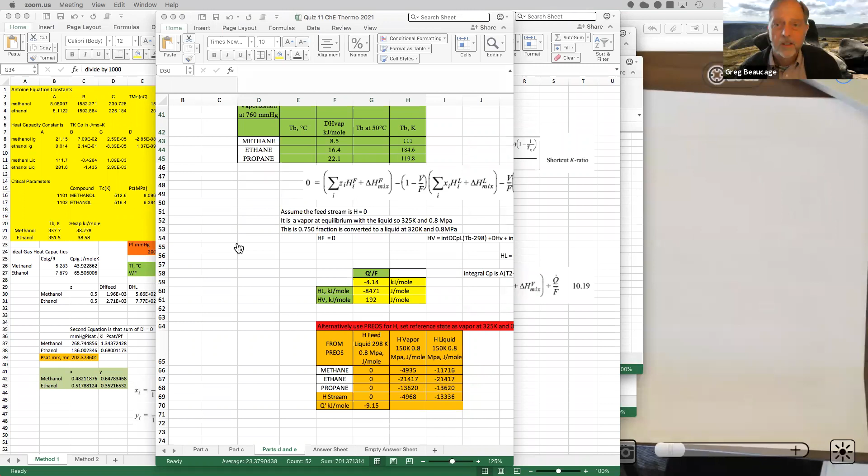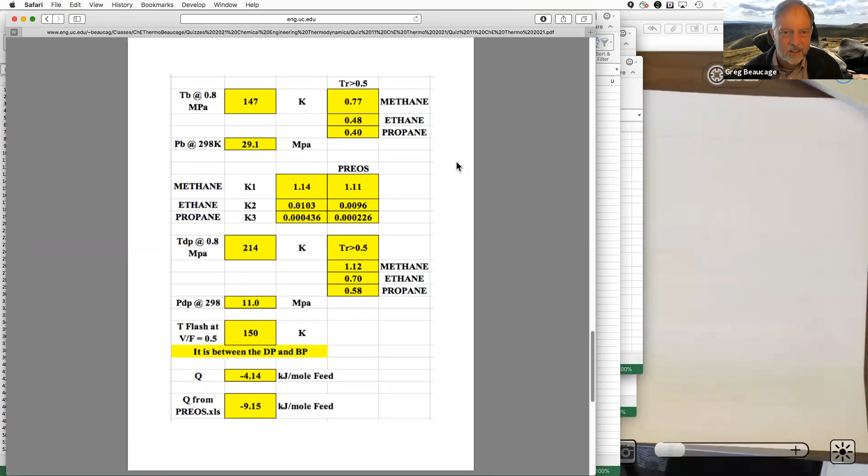Let's see. So the quiz everyone did pretty well on, except one group didn't get it at all. So everyone got 80s or 90s and seemed okay. This is the answer part. So it's just similar to the example problems in some of the old quizzes.

The problem people had, I think, was just with this part E, because you're starting with a vapor stream. So the feed stream is 298 and 0.8. The feed stream's a vapor. So you're given the heat of vaporization, so you have to subtract it from the liquid stream, the product stream, not add it to the vapor stream. So you're feeding in a vapor in this, that was the only thing.

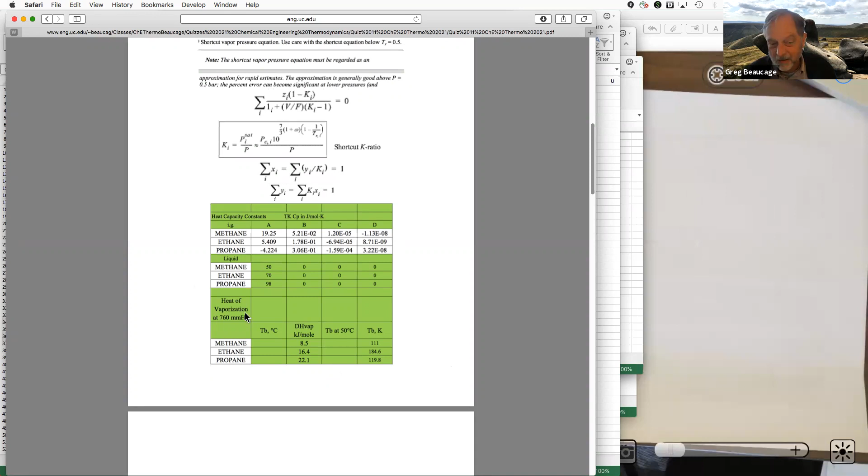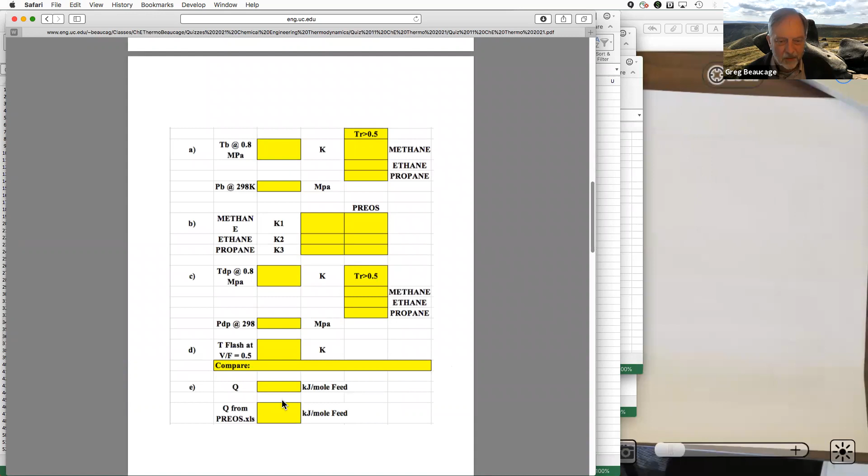So nobody got that, but basically I took 5 points off from everybody, I think. So that was the only issue with the quiz. So a lot of people got 95. Otherwise, it seemed okay. There weren't many questions either, so I think mostly people were okay with this, unless you guys have some questions or there's anything I can go through.

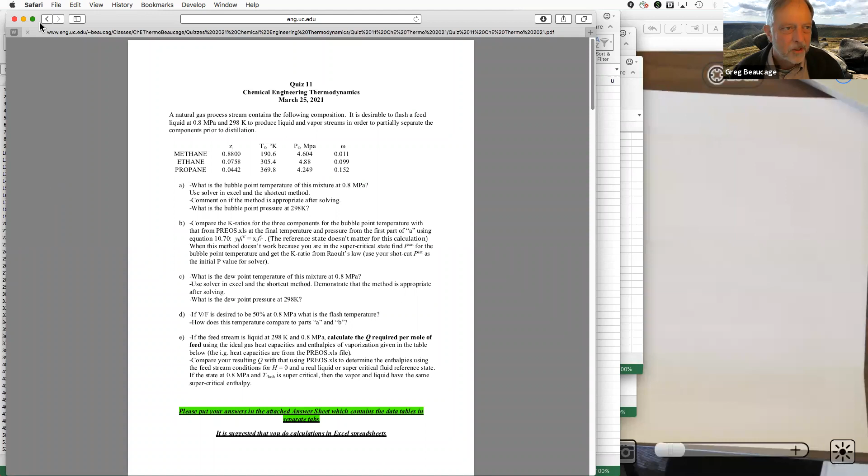Anyway, I put over on the web page, if you want to look at it, this separations book up here, Separation Processes. It's an old book from the 1980s, but it's got chemical engineering separations. Because chapters 10 and 11 are kind of coupled chapters dealing with basically distillation, or the background that you need to do distillation. So the separations book might be helpful to glance at. It's got a lot of chapters on distillation, but it's not really much more in depth than what's in our book.

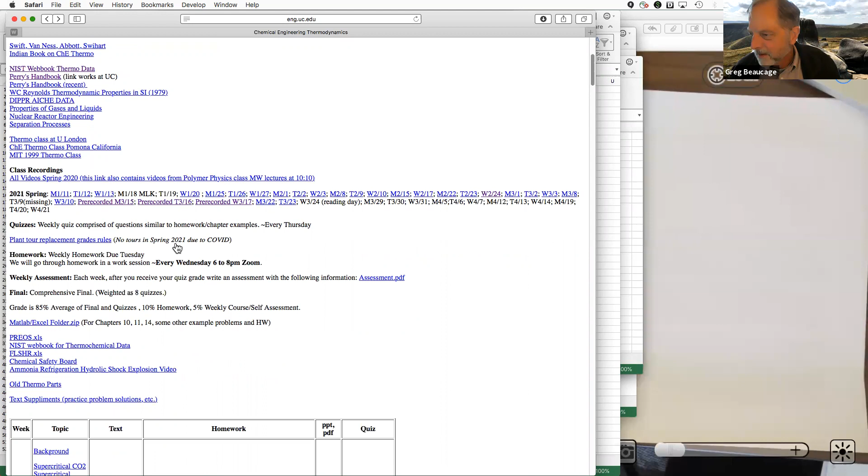So this week, chapter 10 we didn't finish, so I want to quickly finish it. And then chapter 11, coupled with chapter 10, is just for non-ideal behavior, so the activity coefficient. So the two chapters are pretty much tied together. And we don't usually have a split week like this, so that's one of the issues with how we're running the semester now.

Anyway, I think you finished the homework for chapter 10, so you must have done the problems with headspace and tanks and volatile organics. So usually you have to do a calculation to figure out what you're releasing to the environment, and there's some spec for the maximum amount of volatile organics you can release, and it's variable with different kinds. So you have to look up in a table what's an allowable emission for a length of time, especially if you're going to have empty tanks that you need to flush out.

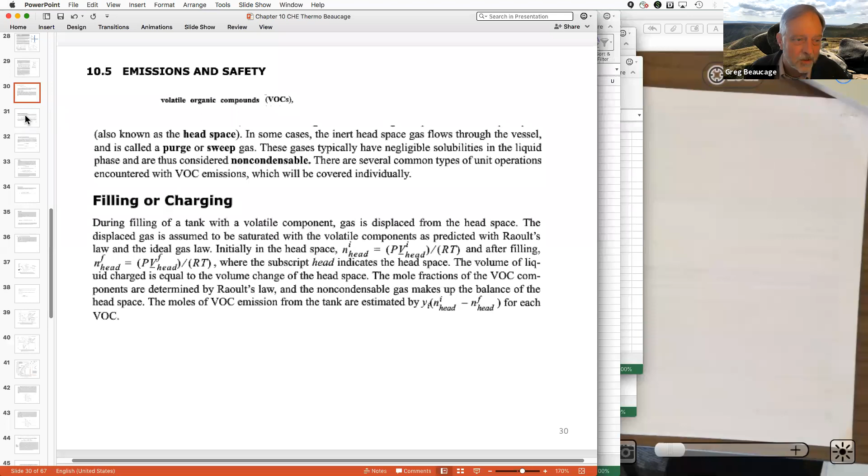And also, as you fill a tank, there's going to be release of the headspace gas. And this stuff is all basically just using the saturated pressure and then the ideal gas equation. That's mostly how these are dealt with in this chapter. It's good that he mentions this because it's something you'll definitely run into. But I think it's just logic to do these, and you've already worked the problem, so hopefully you know how to do that.

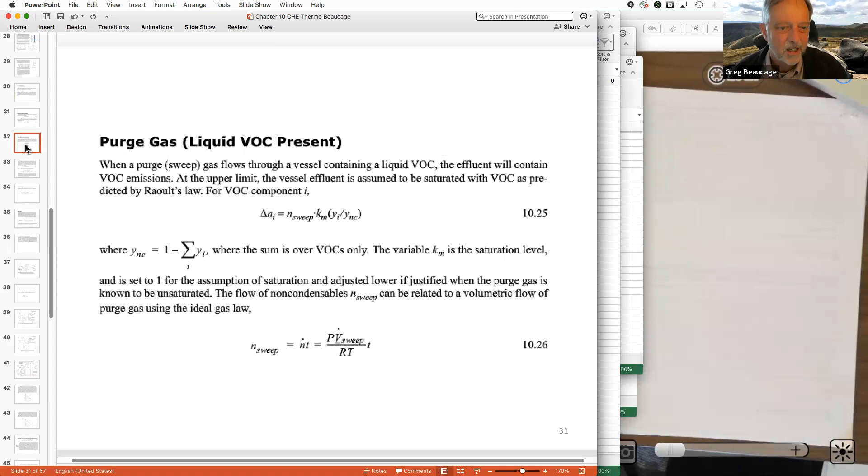Of the venting things, this one is the most complicated. So if you have some kind of a tank and it's been drained, so you drained out all the fluid, it's empty, but it's got PSAT for your components inside of it. And then you want to flush the tank out to remove the volatile organics from it.

So how much time to reach y_i less than death? Like you have some level of concentration of toluene at which you can go into the tank to wash it out, and if you get above that concentration, you die. Basically you want to know how much time it's going to take to get to that concentration.

So you're going to be flushing with some kind of volume, and the tank itself has the volume. And then you want to know what's the time to do that. Right, so you're going to have your concentration of your deadly chemical in time, and your starting concentration is going to be related to PSAT by P, so atmospheric pressure, and the saturated pressure is your starting thing. Then somehow it's going to drop with time until it reaches some kind of safe level.

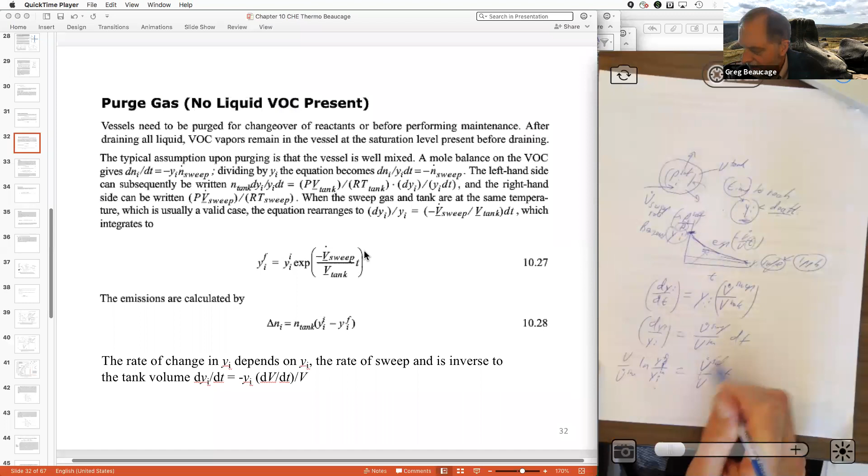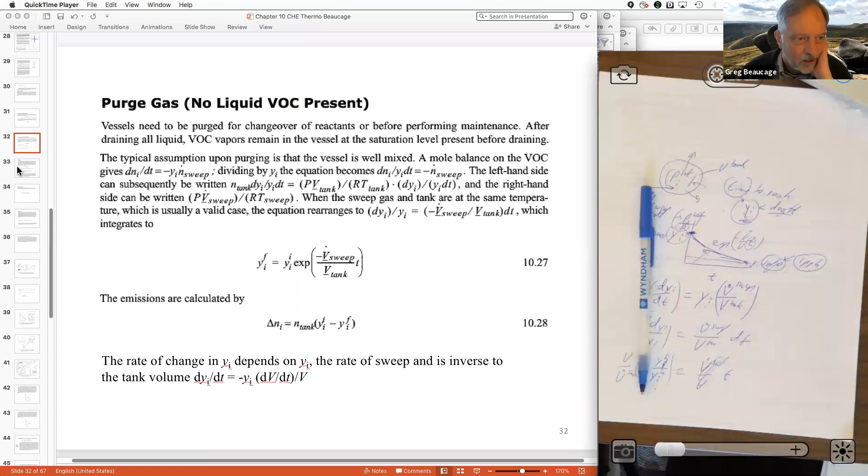So that's the kind of calculation you can expect to do basically all the time. You want to estimate how long it's going to take to make something safe. It's just the same as a radioactive decay kind of thing, you know? So it's like an exponential decay. That's important. And then the rest of this is pretty simple. I think you've already done problems on it. So you heat and it expands and you figure out what the final concentration of the headspace is going to be. Let's see.

Depressurizations. I think you've done some problems with this. It's handy that he's given these things. I mean, this flashpoint calculation is important to determine the danger of being in the tank, right? So even if you have any metal at all, metal on metal will make a spark and then you get an explosion. So explosion means you're making a fire, right? So to make a fire, you're gonna have to have

that's right. So you have to have oxygen and some fuel, and then you're gonna have some products that come out of it. So you can have too little fuel, and then this won't happen. So there's going to be some Y of methane and some Y of oxygen. And it turns out you need a certain amount of fuel and oxygen. So if your fuel is too low, you won't get combustion because the heat won't be enough to continue the reaction. Right? In other words, this reaction is going to release heat.

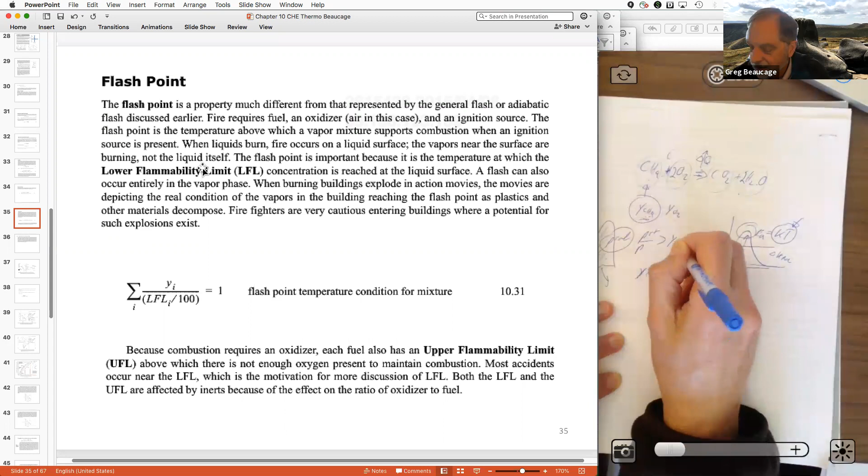So if you had benzene in your tank, but you drained out the benzene, then the tank is full of benzene vapor at Psat. Is Psat over P greater than the Y concentration for LFL, the lower flammability limit? If it's above the lower flammability limit, then you're in trouble, right? Then it could blow up. Then the entire tank is a bomb, right? This is gonna be dangerous. If you're below the lower flammability limit, it's okay.

So if you think about pumping natural gas in pipes, then you're way above the flammability limit. It can't burn. So you're pumping like propane in a pipe. Y is almost like 99%, or 0.99, right? And the upper flammability limit is going to be something like 60%, or 0.6, right? Because you're at 0.99 when you're pumping natural gas, you're safe. But if somehow you get a leak, oxygen gets in here and it gets to 0.6, then all of a sudden you have a pipe bomb, right?

Running through your neighborhood. So basically, there's an upper flammability limit that allows you to pipe natural gas around a neighborhood without an explosion hazard. There's a lower flammability limit that you're really considering when you're doing this tank thing. Like if you have saturated vapor in a tank, you have to be below the lower flammability limit. So you calculate those with this Psat. It's the same thing we've been doing. So that's included in chapter 10, and there's some homework problems to do that. So hopefully that's kind of okay.

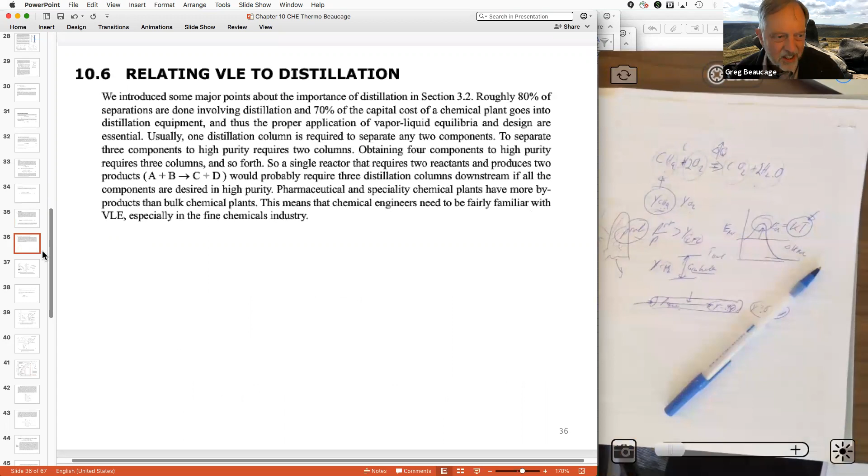So chapter 10 kind of carries a bunch of different things. The other thing is distillation. He goes into it in a little bit more detail here because he's got these K ratios now. So anyway, this is the lab distillation from chemistry lab. So you have a reflux going on. You boil the fluid at the bottom, they reflux. So this is basically at saturation, right? And then you carry off the vapors, and you can condense it into a liquid.

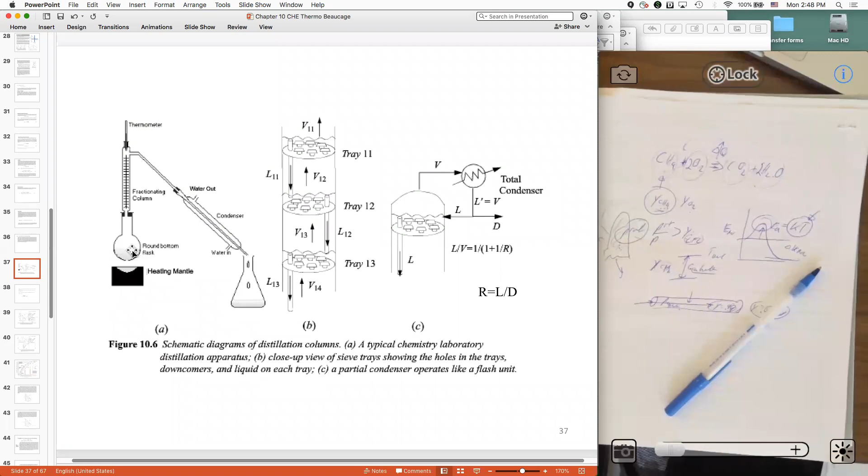And the composition of what's in the boiler and what's in the condensate are different, right? This is richer in the light components. Right, so you have the heavies here and the lights here. So if this is a mixture of a bunch of different things, you could have a heavy key component, and you have a light key component.

So for the light key, you can have a separation ratio, which is the composition of the distillate over the composition of the boiler, right? And you want that greater than a half for the light key, and you want it less than a half for the heavy key. Say you have 10 components in the boiler, then you want to have the one closest to the middle in terms of the boiling, the saturated pressure.

So that the lowest saturated pressure would be on the heavy end, but the highest saturated pressure would be on the light end. You want two components that are near the middle, right? That's going to be your key. So you have 10 components.

This is the saturated pressure. It's increasing towards the light. You want one heavy one and one light one. So a heavy key and a light key. That you know that everything lighter than that's going to be in the distillate, and the other one heavier than that's going to be in the boiler.

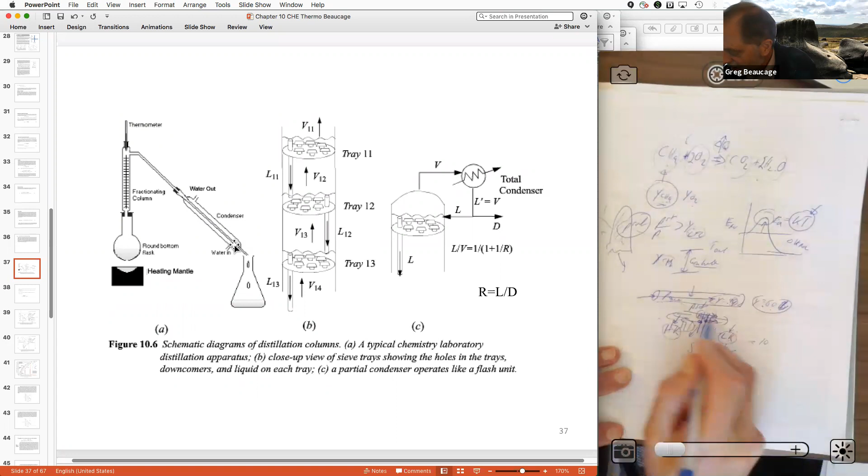Right. So you're separating the thing, and all these components go that way, and all these components go that way. So all the heavy components go to the bottom, and all the light components go to the top. That's the idea. So the heavy key and the light key give you two flags. If you separate those to this 50%, then you know all the other ones are going in the right direction, and all the light ones are going in the other direction. So that's kind of the idea of this, if you have a mixture of things here.

So each of the stages in a staged distillation column, which is only one type of distillation column, are going to be like this boiler. They're going to have a liquid and a vapor in equilibrium. So this L11 and V12 are in equilibrium with each other, and their equilibrium is set up on this tray 12, right? And then tray 12 is condensing vapor 1,2 into liquid 1,2. It's in equilibrium at tray 13.

So each of these trays is like this distillation column. It's like having 3 distillation columns like this. Then here you'd boil it again, and then you'd have another one and another one. So it'd be 3 trays, three of these lab setups. Or you could run the lab setup 3 times to do this same thing.

If you say you doubled the amount of trays, or you tripled the amount of trays, or you made an infinite number of these trays, then this whole thing could just be beads. You could have a packed bed column full of beads or some odd shaped objects, right? They're going to allow this kind of operation to be happening continuously instead of in stages.

So there's different ways to go at this, and you'll learn, I guess, in the separations class, why you'd use one over the other. But basically, the easiest one to figure out is if you have stages, because on each of the stages you can calculate the equilibrium in the same way that you could calculate the equilibrium here. Right.

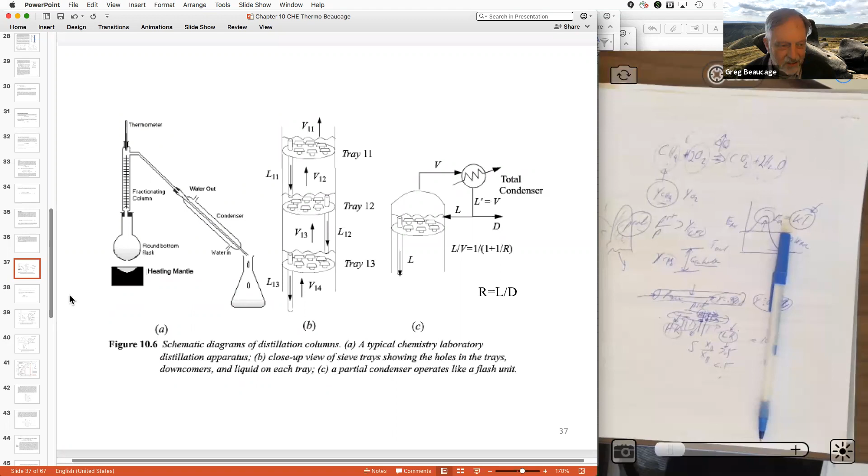So if you want to do a separation where you purify the heavies and purify the lights, then you feed in the middle of the tower. Okay, so the normal operation is to put your feed in the middle and let it trickle down to the bottom and then rise up to the top and do your separation that way.

So in that case, this is how that works. If, say, your feed is half vapor, half liquid, the vapor and liquid compositions are going to give you like 0.6 and whatever here, right? So whatever your feed composition in terms of liquid fraction, then you'd go straight out, right? If it's pure liquid that's being fed, then you go straight up. And if it's pure vapor that's being fed, you go horizontally.

So depending on the composition of your feed, you find the feed composition, like the Z for the feed composition, and you go to here, and then you're going to go across this line depending on the state of the composition. And that decides the slope of the two curves and the pivot point for this. And then this is your purification of the heavies. This is your purification of the lights, right? And then they're going to be at equilibrium. That's the equilibrium point for the feed tray.

And each of these points is a different tray in the distillation column. And then you're changing composition to the next tray and the next tray and the next tray, along the staircase. Right, so that's kind of, this is just from Wikipedia. Basically this is also in that separations book that I put on the webpage, in a little bit more detail. So you can glance through that if you're interested.

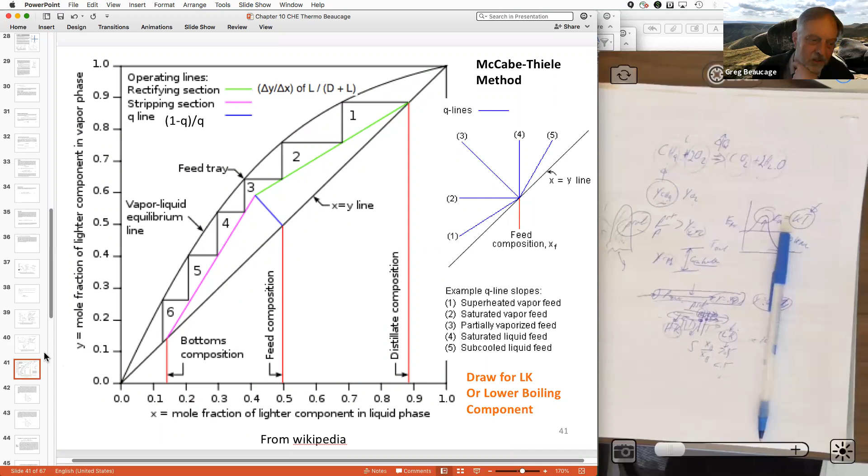So of the separations, 80% are going to be done with this kind of thing in a chemical plant, right? And that's going to account for 70% of the operating cost. This kind of separation is most of the job of the chemical engineers at a chemical plant. That's why separations is an important subject. But for our purposes, it's an example of how you use thermodynamics. So it isn't necessarily the core competency for this class.

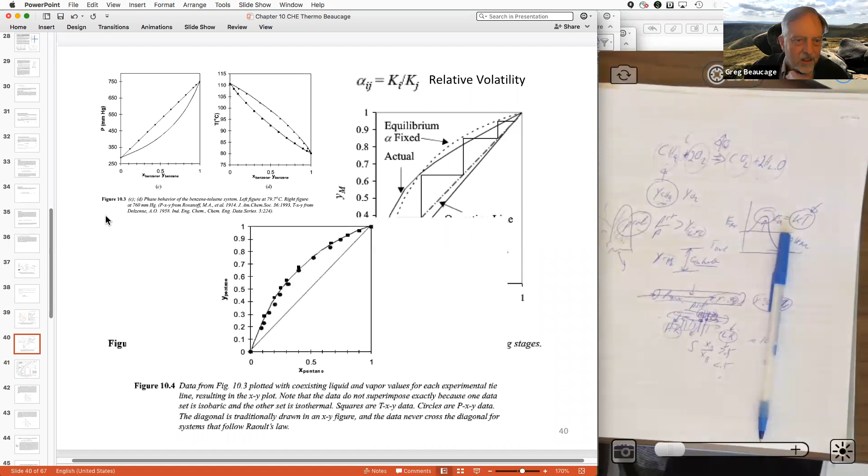What else is in here? There's this estimation equation for ideal solutions for how many stages you need in a column. You can do a calculation. I think there's a homework that uses that equation. But that's kind of all I want to go through for that stuff. Hopefully it didn't take too much time, it's really just a glance at it here. You aren't supposed to become an expert in this class. In separations, you'll become an expert in this.

So this is also mentioned. Chapter 11 is about how you deal with non-ideal systems, but this just introduces the terminology. If two things are similar to each other, like benzene and toluene, then they basically follow Raoult's law, and they're going to have the normal behavior we've looked at so far. Temperature-composition, you can see there's no deviation from Raoult's law. A straight line is right in the middle of this. And the pressure-composition has a straight line, it follows Raoult's law.

So you can have deviations from this. They call it a positive deviation, like propanol-water. So it's going to look like this. And you can have a negative deviation. So this is acetone-chloroform. The straight line is Raoult's law. The vapor pressure is proportional to the composition, right? And then these are deviations from that.

Positive deviations occur when propanol likes to be with propanol, and water likes to be with water. That gives rise to this positive deviation. And acetone prefers to be with chloroform rather than with acetone. So that causes this negative deviation. So with this theory of why this happens, you can kind of predict which kind of deviation you would get.

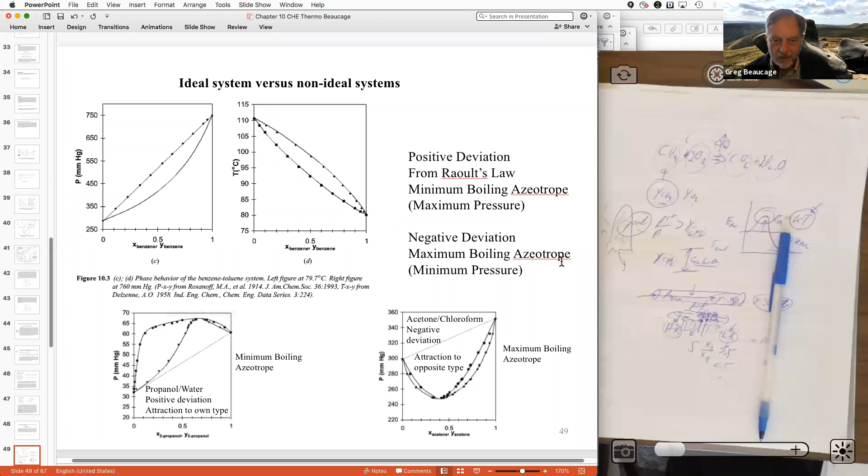Here it's just to say positive deviation, negative deviation, the word azeotrope. Minimum boiling azeotrope means it's maximum pressure, because the T composition chart is the opposite of this. It's going to be below. And then negative deviation means maximum boiling azeotrope, means the temperature composition one will be above. So I'll show you those in a second.

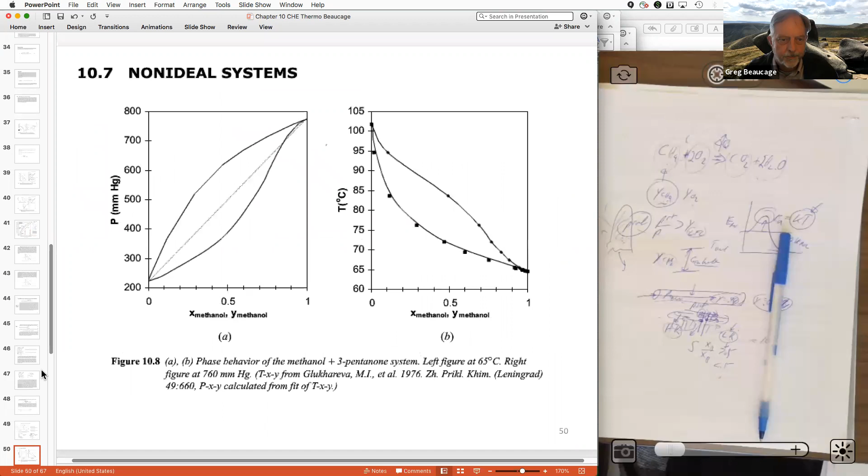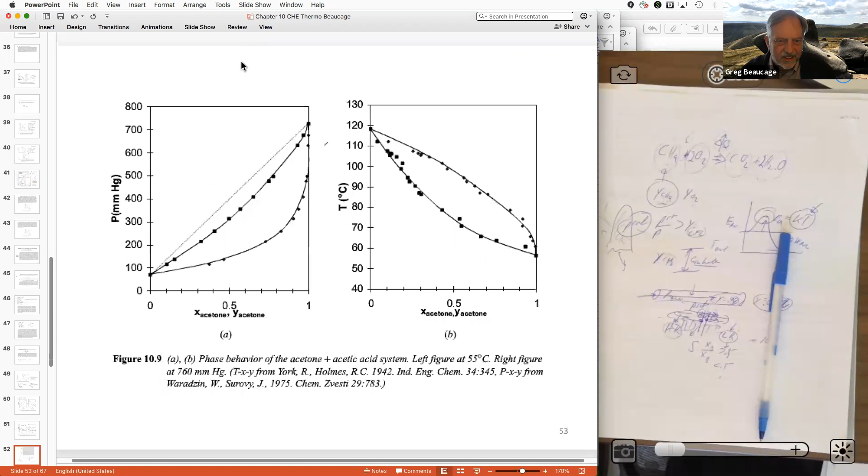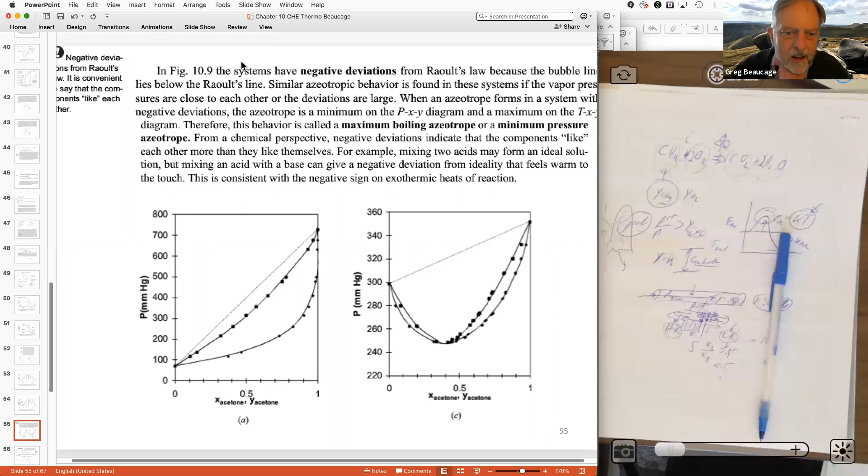Then there's this thing that's usually kind of a separate chapter in a normal thermo class because it's engineering. It's less emphasized. So we had these equations, we had this guy, and then we said, if you want to say Gibbs free energy, the change in Gibbs for boiling is going to be H minus TS. So you can say that a change in Gibbs is going to be, let's see, that's not what I wanted. That's something we need, but not what I wanted. dG is minus S dT and then V dP.

So you can say dG equals, so this is dG already, right? So minus S is dG/dT at constant P. And then V is dG/dP at constant T, right? Because that would just be an expansion of this, from those two parts.

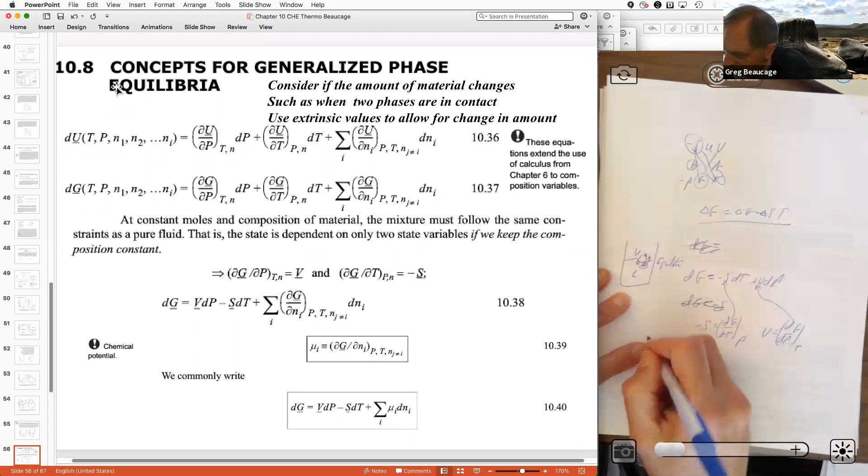So say you have liquid and vapor, right? And the vapor pressure involves an atom, or a molecule, going from the liquid into the vapor, or from the vapor back into the liquid. So that's what we talk about in terms of equilibrium. So if you have one atom that's going to jump up into the other phase, then there's a change in the free energy of the system with respect to that atom changing phase.

So instead of G, the intrinsic number, meaning per mole, you need the extrinsic, which means just the value, like G underscore. Because if you're changing the moles, you need to consider G underscore. And then you can write this same equation for G underscore, because it's the actual value, not the per mole value. Then you have dP and dT terms. So this one's minus S and that one's V.

And then because this isn't per mole, you can ask how the Gibbs free energy changes when the atom jumps to the other phase. So that free energy change when the atom jumps to the other phase is dG underscore dn_i.

So say in the liquid, that's called the chemical potential. That's the definition of it. So we have this chemical potential term showing up: dG/dn, everything else held constant, including the other components, the composition, and then dni for that component. You're going to sum over all the components in the system. So that sum will be just the chemical potentials of the system. And we showed already the chemical potential is related to the fugacity, RT log fugacity.

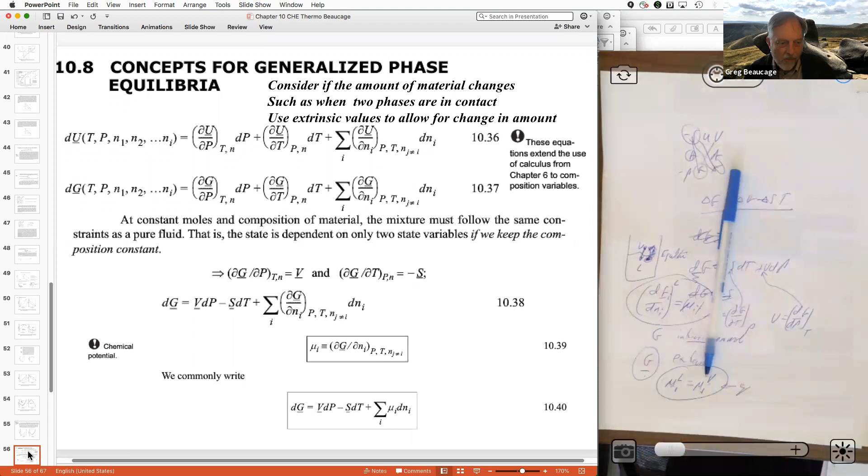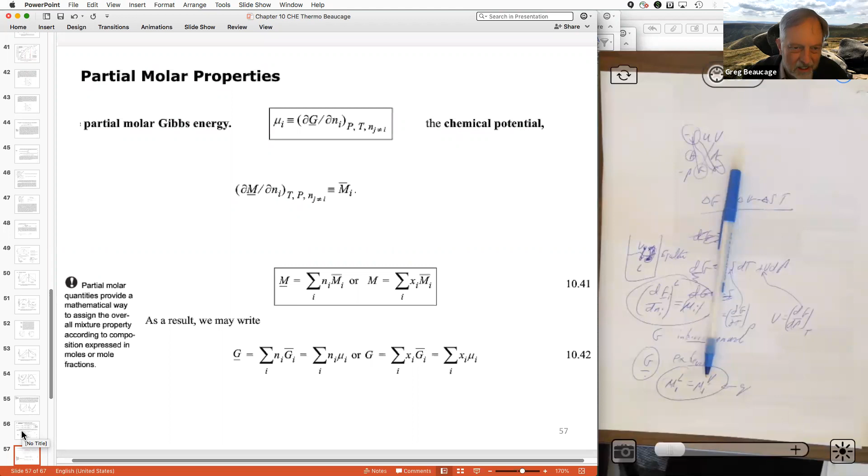Okay, so that's kind of important, but not in any homework problem or anything. It's just a basic thing that's usually emphasized. In this book, it's just an aside at the end of the chapter. So you rewrite all these equations we had before into this idea that they can jump from one phase to the other. So you can talk about the chemical equilibrium between the two.

You have these equilibrium terms for two phases. So this chemical potential is going to have two things with it. So you get mu i, it has to have i, and it's got to have a phase. So each chemical potential is going to be mu of benzene in liquid, mu of benzene in vapor. And those two are equal at equilibrium, but they don't have to be equal if it's not at equilibrium. And then you're also going to have mu of toluene in vapor and mu of toluene in liquid.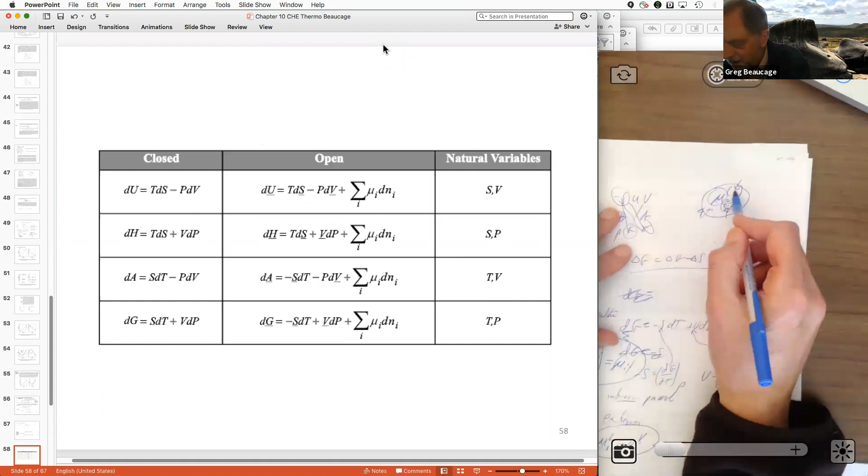So if you have a binary solution with two phases, you have four chemical potentials, right? And two pairs of them are going to be equal to each other if it's at equilibrium. So every time you say chemical potential, you have to say what phase and what component. You can also have a chemical potential for a pure system. You wouldn't have components if it was just benzene, but you would still have two phases, liquid and vapor, or liquid, vapor, solid. So that's kind of how this chemical potential thing works.

What else? Equilibrium criteria. When it has a hat over the fugacity, that's a component in a mixture. So the fugacity of i is just for pure. Fugacity with a hat means that component in a mixture, right? And then this is just what we had before, that the chemical potential change is the change in the log of the fugacity. We had that before, so it's just reiterating that. And then at equilibrium, the component fugacities are equal.

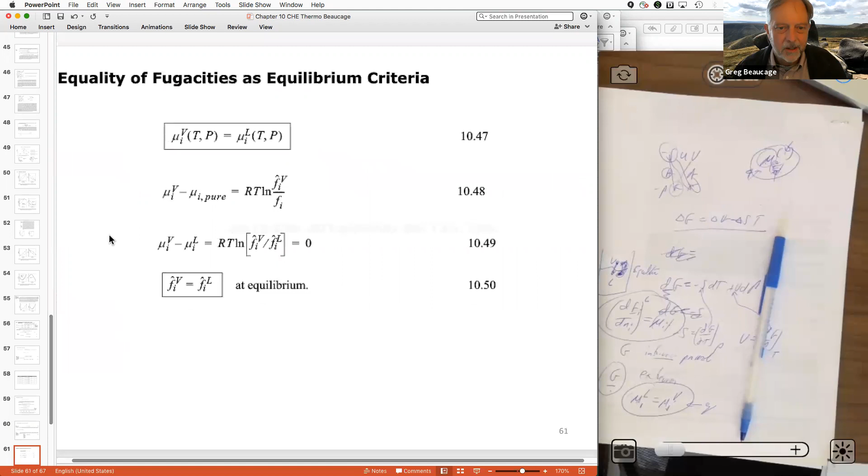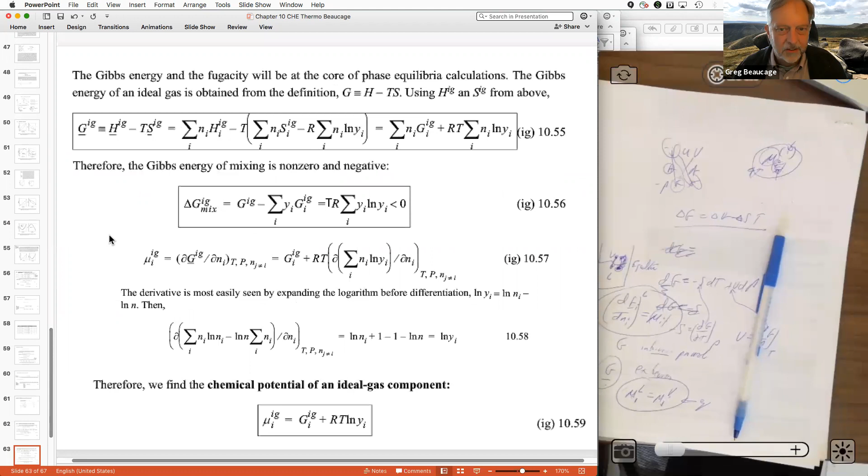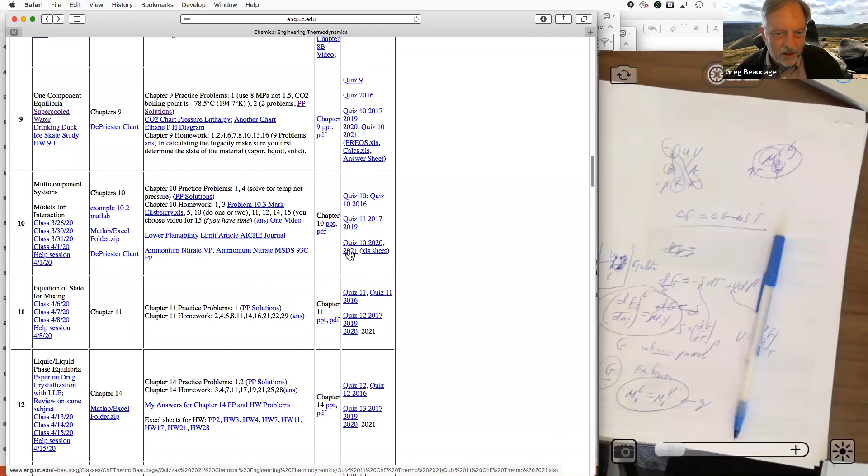And then we got that 10.70 equation that was in the quiz from this kind of business. Wherever that is, this was 10.70 in the quiz. Let's see. Yeah. 10.70, this business. So we're getting the pure component fugacities, and we get the y and x. That's kind of worked through at the end of the chapter.

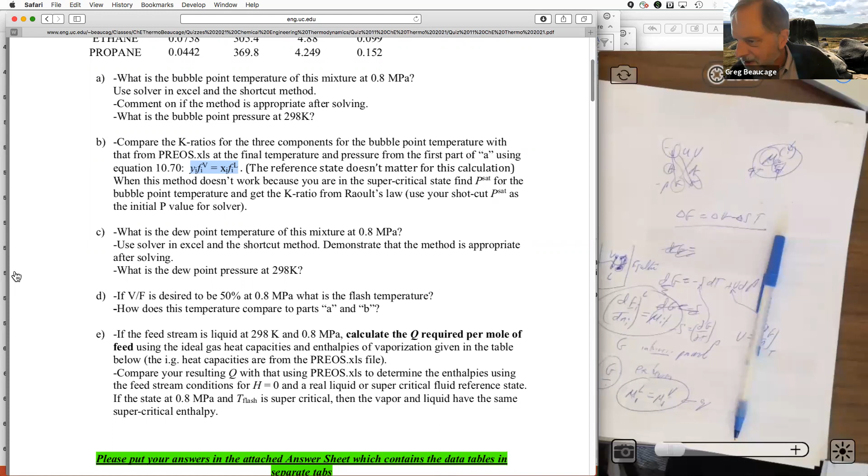So I don't really want to dwell on this because it's kind of odd, a little bit. Mostly chemical potential is pretty easy to work with, and that's what chemists work with. And the fugacity gets to be pretty complicated. You can always relate it back to chemical potential. So that's the idea: understand chemical potential as equal at equilibrium, and then the fugacity is also equal.

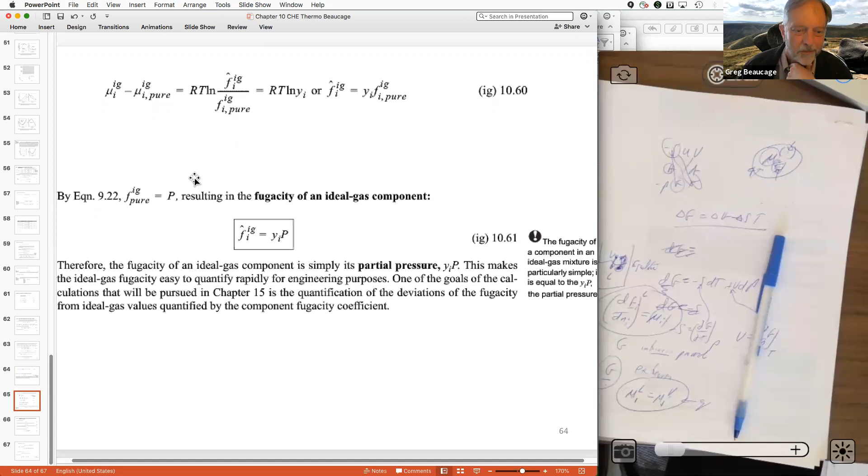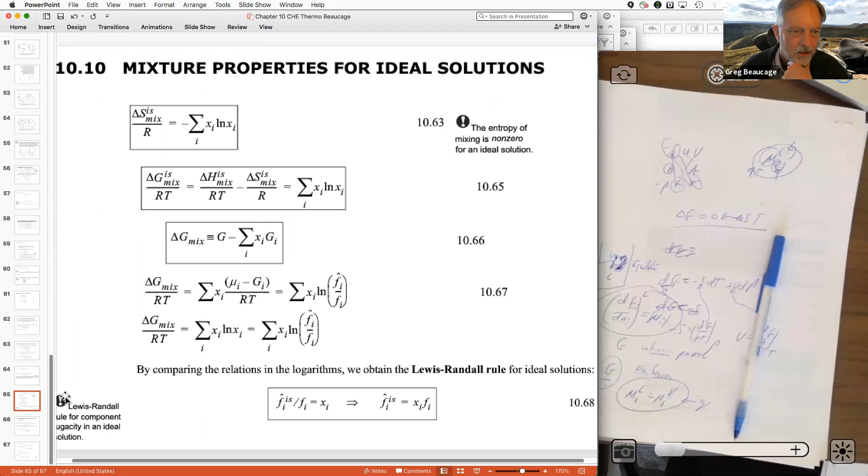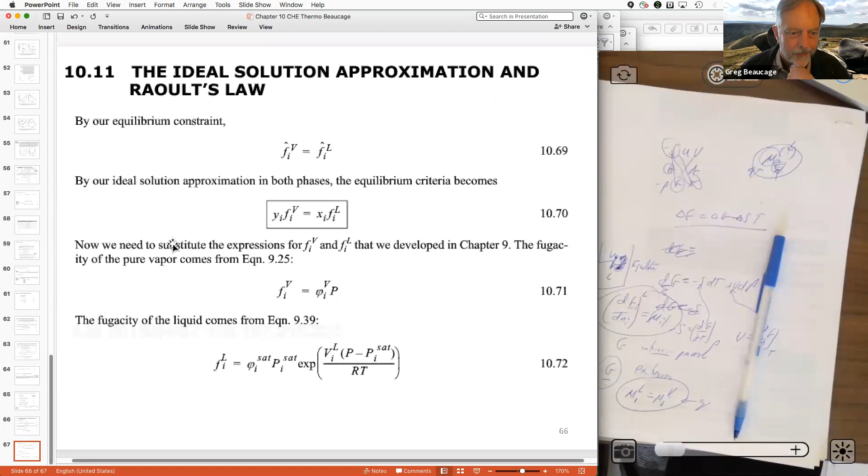And then there's some general rules for fugacities. You can just use those if you run into it in a problem. I think that's the main idea here. That's 10.70. So that's our thing for equilibrium. So that's about it for chapter 10. That's all I want to do on it. There's a little bit more, if you want to read it, it's okay. But I'm going to bury chapter 10 for now.

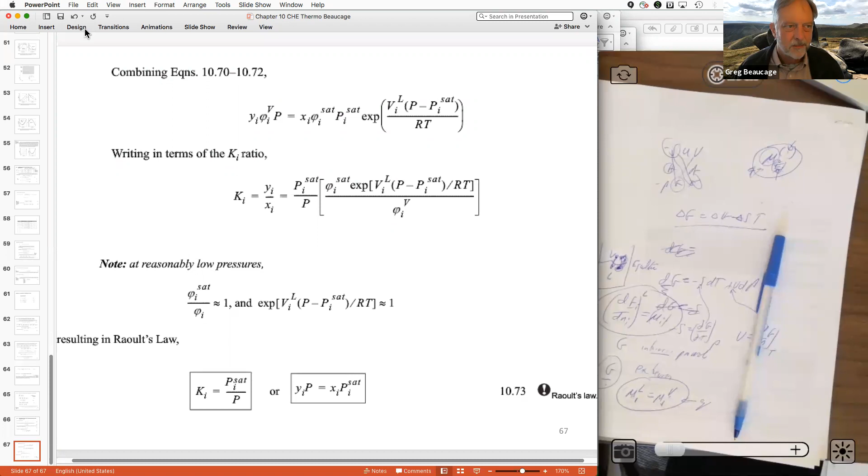What have we got on time? We got 10 minutes, I guess. So I want to talk about how to deal with these deviations. Okay, I can definitely do it in 10 minutes. So you can have Boltzmann's law, right?

Basically it says that a probability is going to be related to Gibbs free energy over KT or RT. So the probability, if there's some kind of change in energy related to KT, is the exponential of the negative. So if that energy is 0, exponential of 0 is 1, so the probability is 100%. If there's no energy barrier, then it will absolutely happen. And if this energy barrier is infinite, then that probability goes to 0. The bigger the energy barrier, because it's negative here, the lower the probability. So that's the logic.

So if you have a mixture of A and B, the probability of finding A is XA, the composition of A. Say it's in a liquid state, or a gas state. So if the probability is XA, and we had before delta G is delta H minus T delta S. So if we say there's no enthalpic interaction, we only have entropy. We're going to consider that the atoms can pass through each other. There's no enthalpy of interaction at all. There's no repulsion. There's no excluded volume. This thing is 0. Then you just have this term.

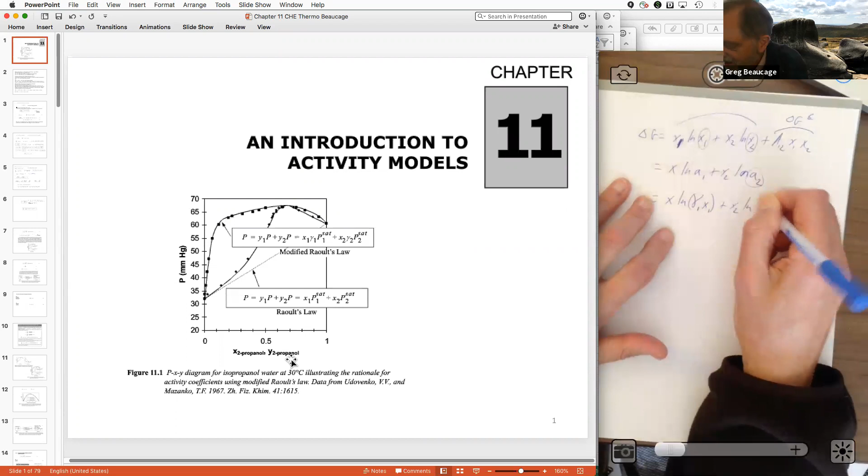The reason you want to do that is because then if you want to talk about the excess free energy, then you have A12 X1 X2, and because ln of something times something is ln of something plus ln of the other thing, that will be X1 ln of gamma 1 plus X2 ln of gamma 2. So your excess term up here becomes this expression with these activity coefficients, where gamma 1 equals activity 1 over X1. So you have the activity and the activity coefficient, and then you have this Margules coefficient, and they're all related to each other.

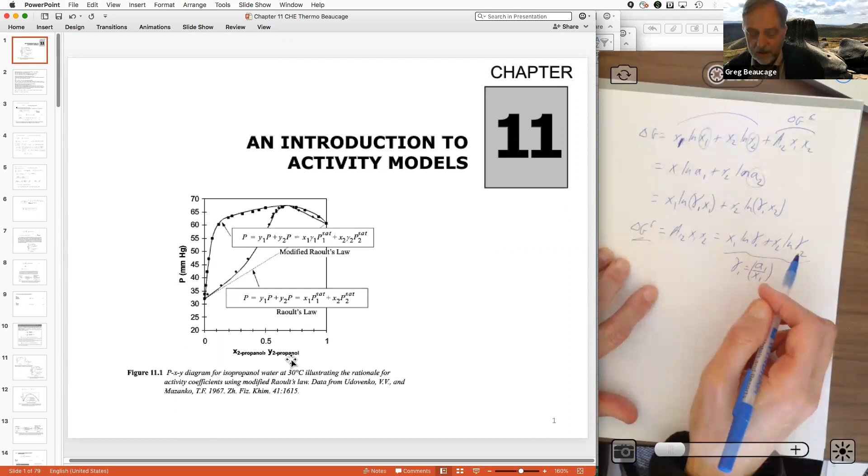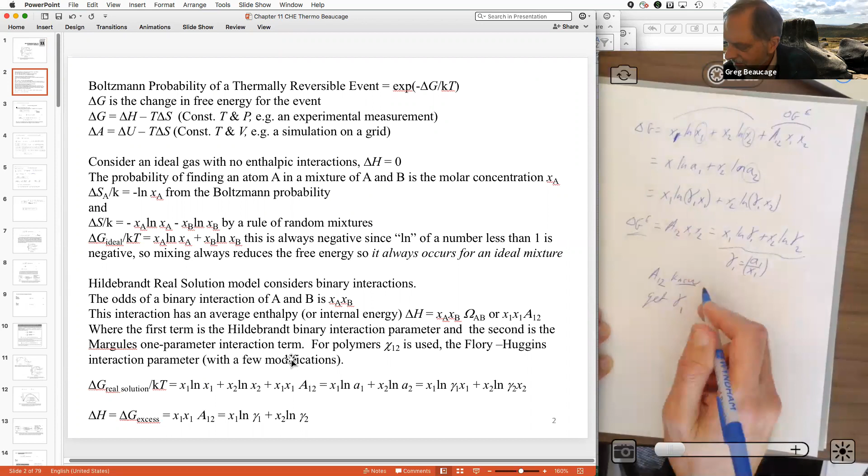Right. So how would you calculate it? Like if I know A12, then how do I get gamma 1, the activity coefficient? Right. So you get that by this. So you say this excess is going to be the sum over XI of the ln of the gammas.

So then you could say, this is the extrinsic Gibbs free energy excess. So that's the number of moles times the intrinsic. So the Gibbs free energy per mole gives me this extrinsic. Right. So this is the actual value. The change in that with respect to N gives me the chemical potential. The change in the actual value versus removing one of them gives me the chemical potential. That chemical potential is this ln of this activity coefficient.

Right. And this thing can also be calculated in terms of Margules, because this G is the Margules times X1 X2, and this thing times N gives me G, so N times that gives me this. And then if I multiply that out, I have A12, so N times X2 is N2, and then N1 over N is X1. Then I can do the derivative of this to get the gamma. And if I do the derivative of that, I get two terms.

The first one is, N2 doesn't depend on N1, but N1 does. So this becomes N2 times 1 over N. Then taking the derivative of the second one is 1 over N squared times N1. These both have an N in it. You pull that out, N2 over N is X2, and this thing inside is X1, so it's 1 minus X1. 1 minus X1 is X2. So you end up with ln of gamma 1 is A times X2 squared.